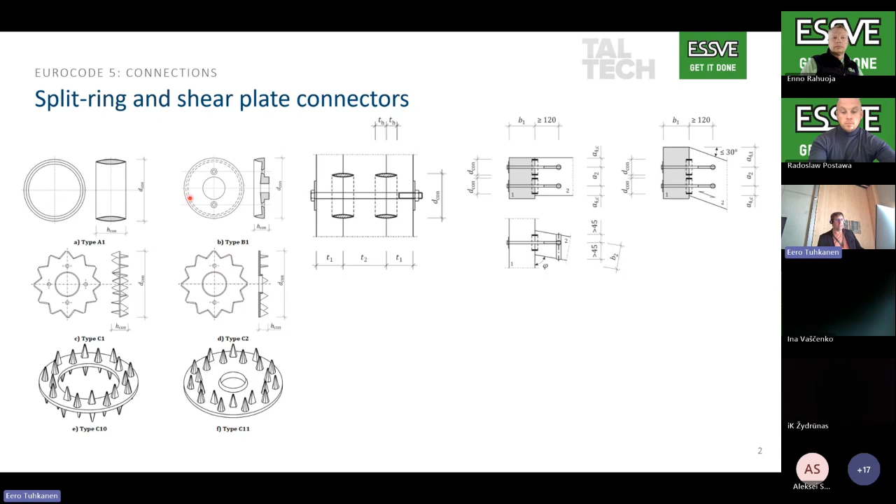in the connection. Also, the good thing about this bulldog type dübel is that it will minimize the slip we have in bolt connections. If the bolt connection is ready and we load it, first we get a small slip before the bolt connection starts taking the load. But if we use the bulldog dübel between the timber elements, we can avoid the first slip and get a stiffer connection.

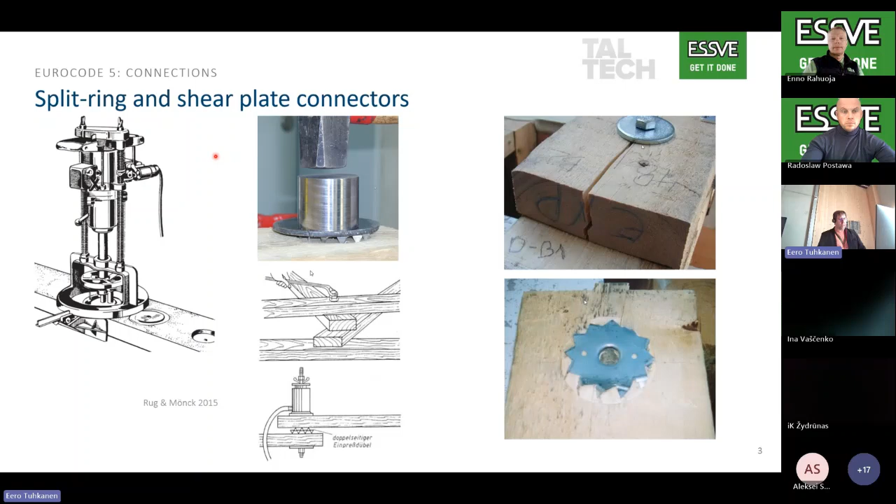Maybe the only problem is the implementation, or how we build the structure. This bulldog dübel needs a certain force to press it into the timber. I did some tests myself many years ago, and actually it's possible to hammer it into the timber, but it's not the highest quality. But there is some hydraulic equipment available that we can also use on site to press this type of dübel into the timber. So you can use it as it is, and this chapter is not changed much compared to the current Eurocode.

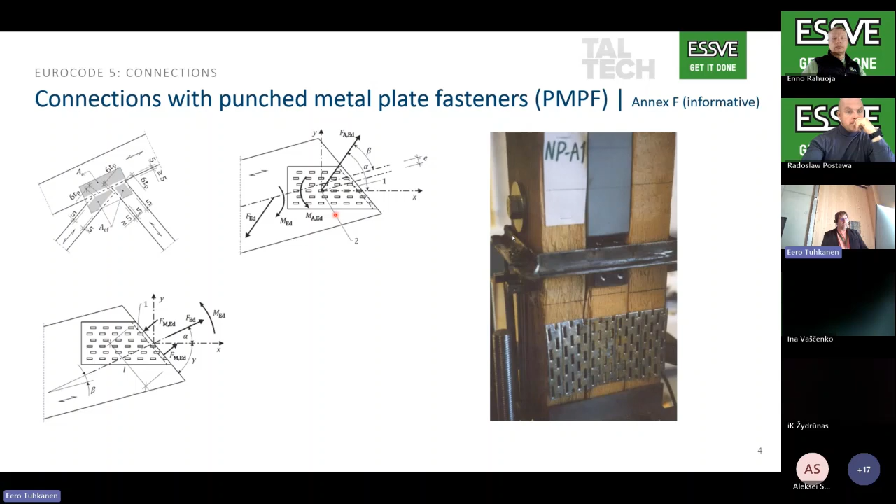The second type of connection is punched metal plate fasteners. Metal plate fasteners are moved to Annex F because these are mostly related to the producer, and the producer gives the required parameters for design. The design rules are the same, but in the new Eurocode there are more examples or situations shown of what to consider when we design punched metal plate fasteners. Last time I spoke about these reminders in the new Eurocode, that if you create a connection like this, you are reminded that you also have to check the tension perpendicular to the grain in the connection, and many different situations.

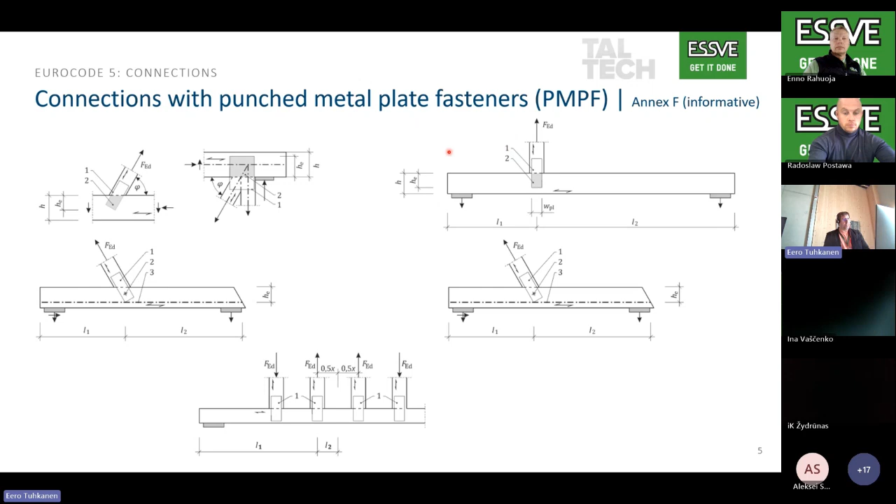The new connection type is a connection with expanded tube fasteners. It's a special type of connector, but the steel tube itself is not special. There is a strength class given. It can be normal steel tube, but the implementation, or how to press that into the wood, is special or needs special equipment. And the idea of this steel tube fastener is to increase the load carrying capacity of the connection, reduce splitting,

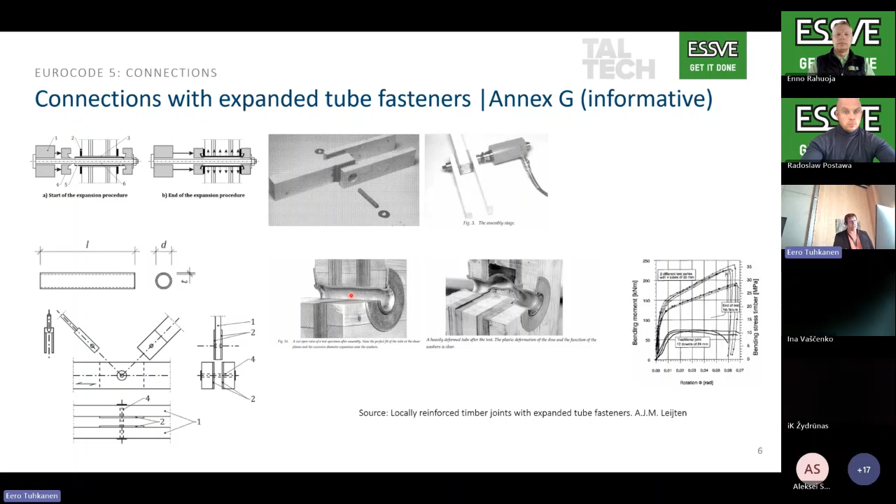because this type of connection uses densified wood in the connection, and also the stiffness is higher because there is no play in this type of connection as we have in the bolt connection. It's developed together with the seismic standard, so this type of connection is mostly related to the seismic region.

Question from the last session. Actually, this was the question not from the Baltic webinar, but from the Sweden webinar. But as I have this information here, someone asked last time: do we have in the new Eurocode design rules for bolted connections which are placed in circles? The answer is yes and no.

For so-called moment-resisting connections in the new Eurocode, there are only given the spacings and end distance rules for such type of connection, but not the design model, because design models can be different, and this type of connection is calculated according to the normal Johansen connection. The only rule which the Eurocode gives for this type of connection is the spacings and edge distances.

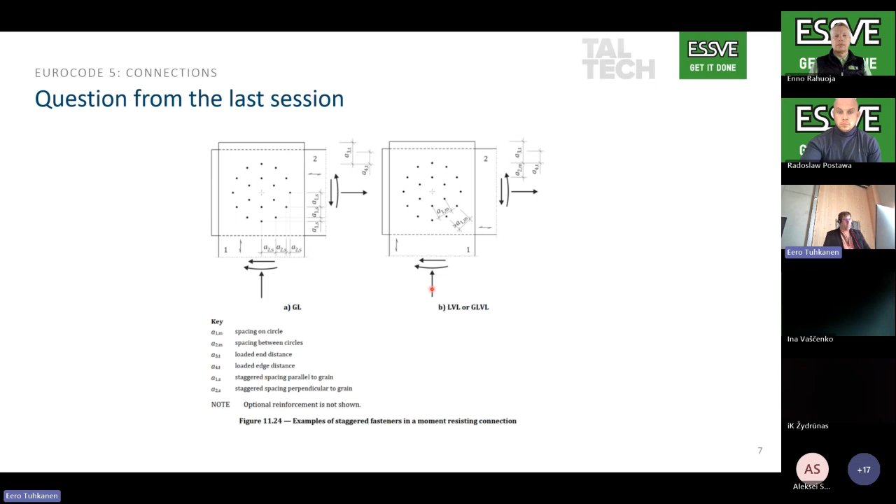And the next topic, which is our last presentation in this half year, is additional provisions to connections. In this lesson, I will talk a little bit about additional provisions and the other annexes in the new Eurocode. So this is all from my side.

From my side, I will take a little bit of an overview myself, as I saw that 50% of the users of ESSWOOD haven't done the registration yet or haven't used it yet. So maybe I will take the lead of the screen from Radek, and from a screen sharing point of view, we will guide you a little bit to where to find the ESSWOOD calculation program or other support tools from our website very quickly, and then we go for inclined connection.

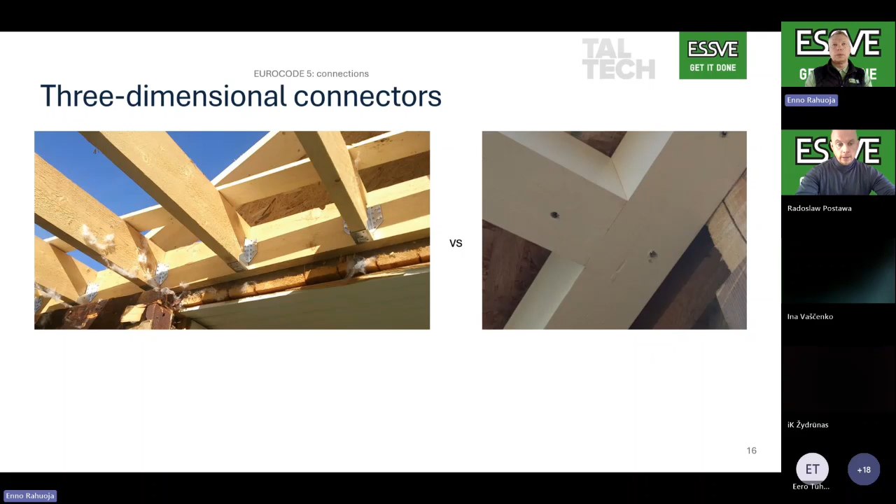Today's focus is different from previous time. Previous time we were looking at metal connectors, but we are not able to cover all applications with metal connectors which are out of the 90 degrees. So we will look into some inclined connections which are on an angle, either downwards or sidewards.

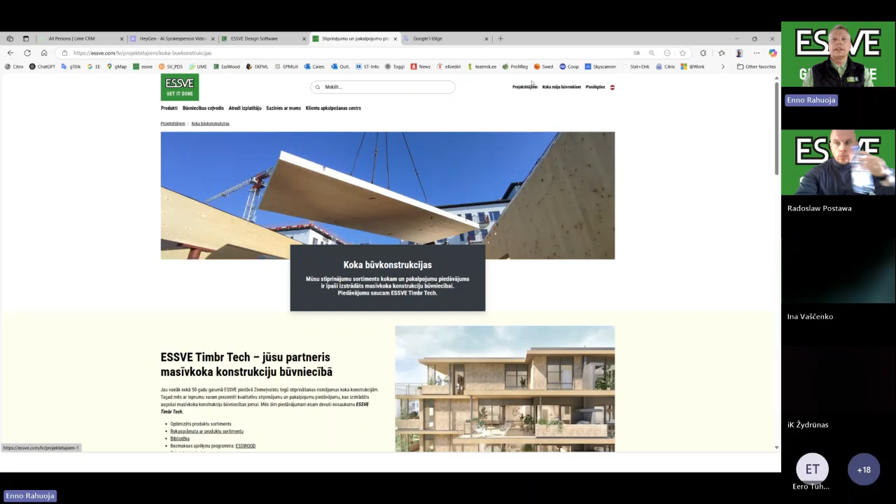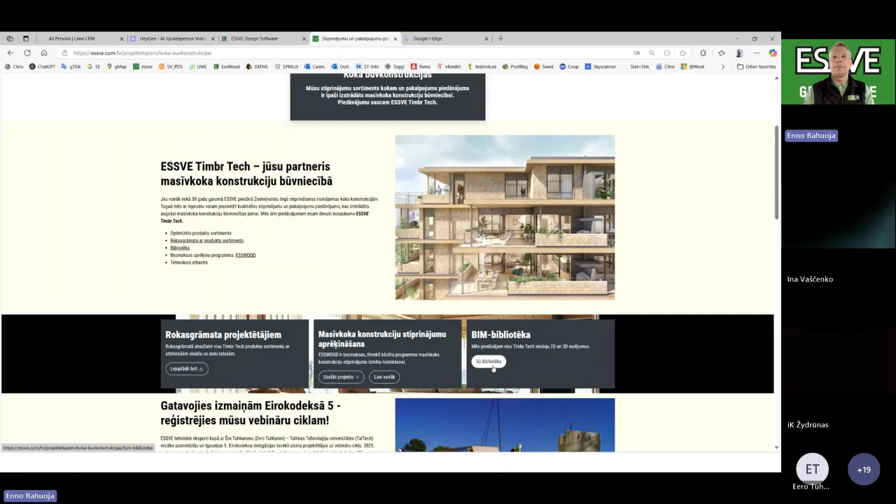To look now from the website, I have in front of me the Latvian website. Those who speak Estonian or Lithuanian can easily switch the website, but for engineers, here you will find the site where you can choose concrete, for example, or timber. We have also a calculation program for concrete. When you go to the timber side, you will find the ESSWOOD calculation program a little bit lower. For timber, you will also find the BIM library, with 2D and 3D drawings. So feel free to find all those locations.

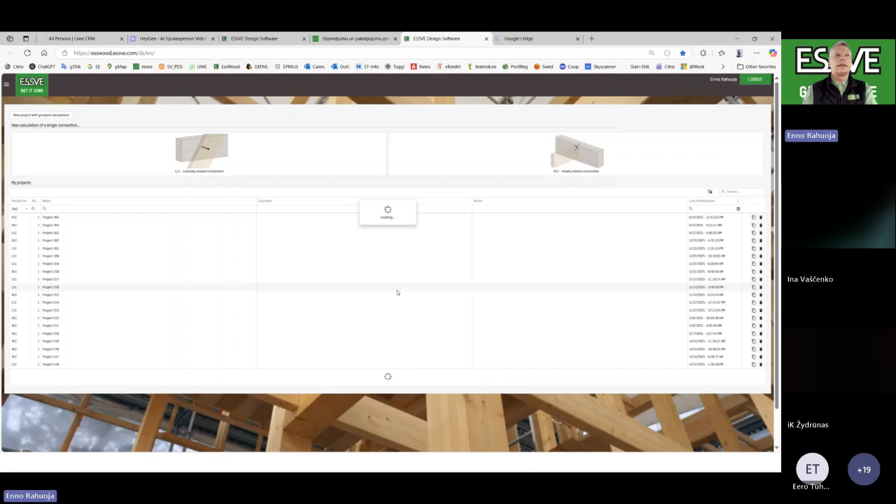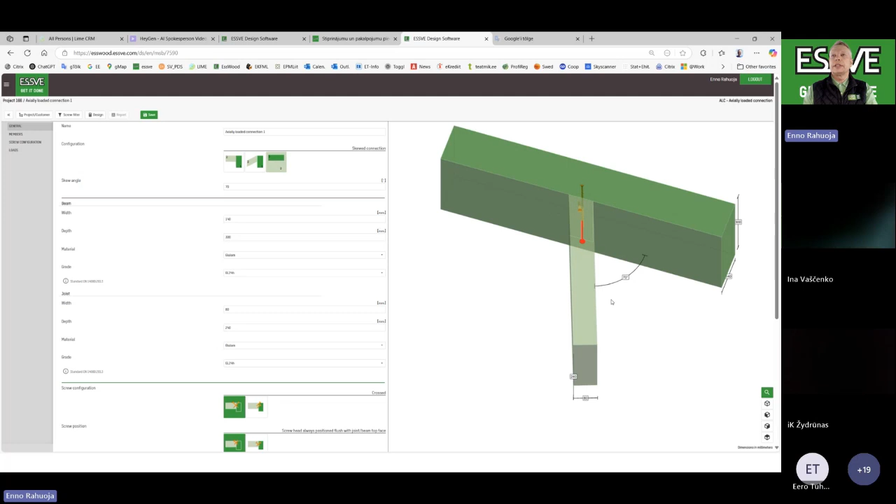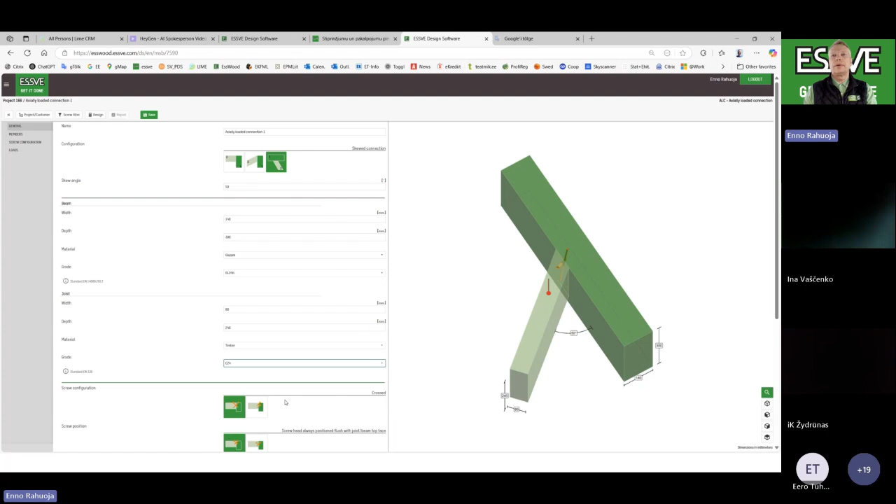As promised, we will not look at the 90 degrees connection, but at the angle connection. From the practical point of view, we can change the angle here. Let's make it even sharper, 50 degrees, for example. For parameters of the timber, you can select them here. Instead of glulam, you can have ordinary timber, for example, and a little bit higher grade, C24, for example. You can also change parameters here.

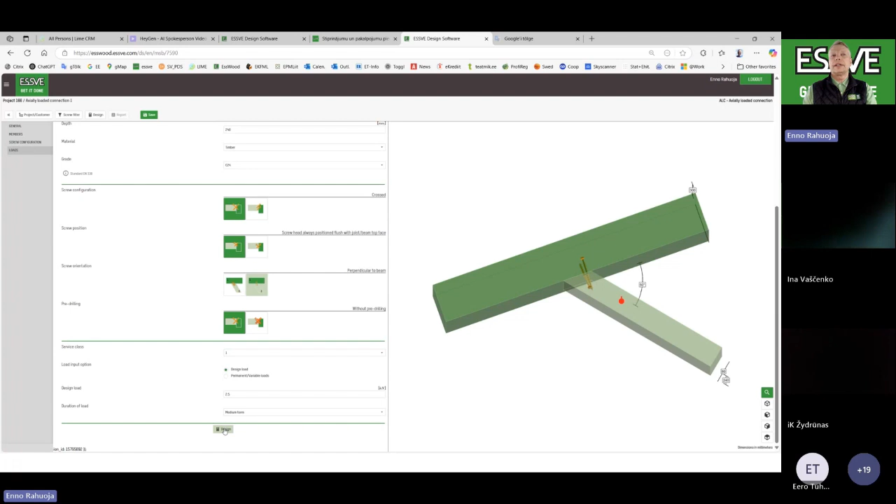But from a quick point of view, if we look at such an application and how installers like to install it quickly, installers often like to install it faster this way, because it's cross on that main beam or main rafter. And if I go to a very quick calculation service here, then there are not so many choices at the moment. It gives only one choice.

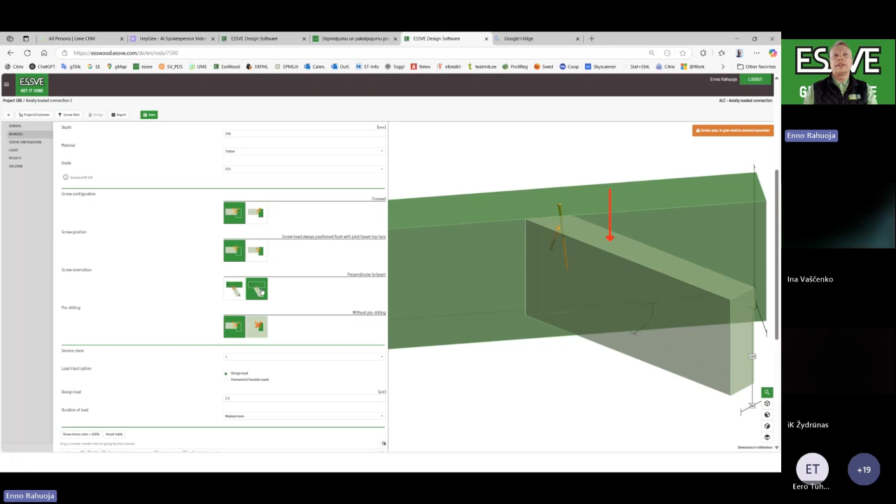And even here we need to look also at the red-marked perpendicular load. So there is an option also to move this cross-fixing a little bit to a lower area. Then we go back, and if we move it to a lower area, then we have a risk factor that moving from up to lower, we might not find any application at all. So the best choice in this part is to keep the connection along the side beam direction.

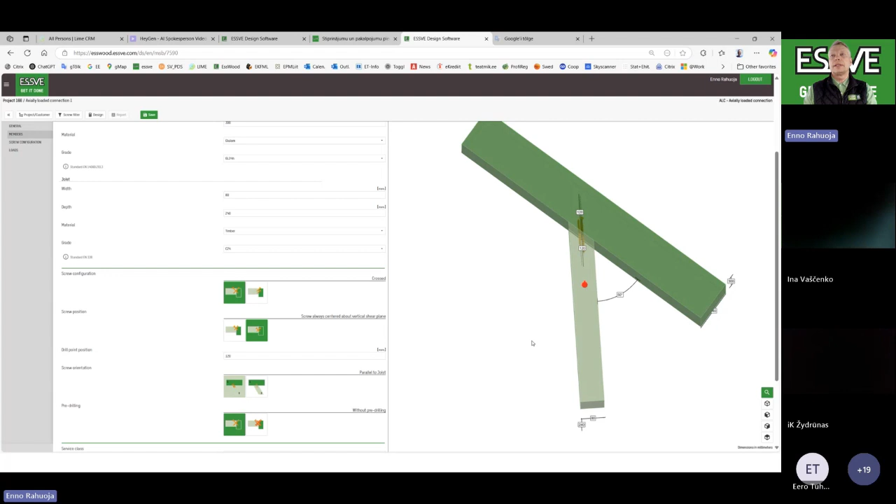So we have it from here, so that the fasteners go along the side beam to the rafter. And let's say in the first calculation, the connection is up here in draft mode on this calculation tool. You can also select here the service class. For example, for roofing, often service class 2.

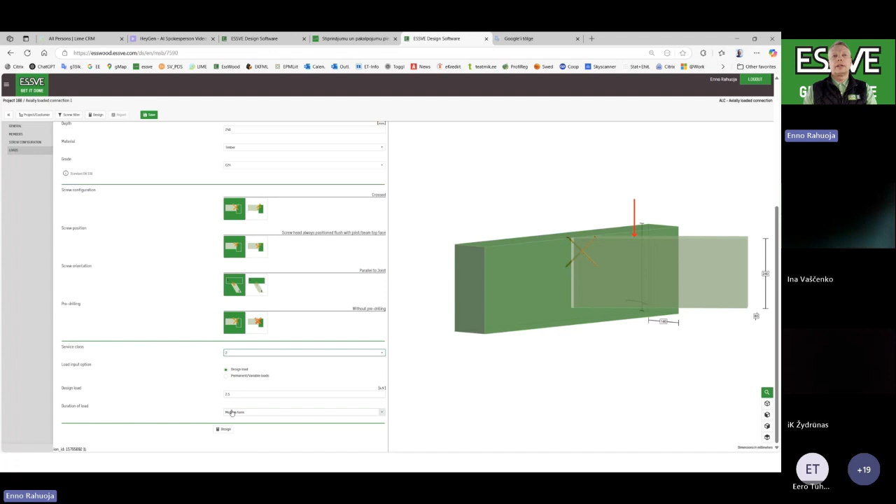Here you can put some design loads or permanent loads on it, change the figures, and when you go for the design calculation, then you will find out that we are a little bit limited on this type of connection, with the length of 245. For the others, we should do some additional calculation to see whether it fits or not, or secures all the loaded area. But here is a small trick which you could play.

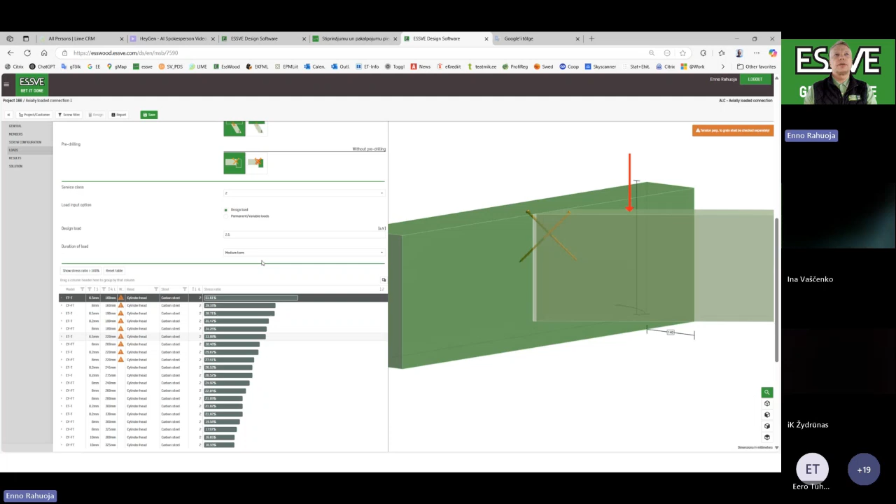So when you go back and move this cross-fixing a little bit lower, you choose here, let's say, middle fixing. So I put it here. Before it was up here, now we go for lower fixing. And we still keep the direction along the side beam. There is also an option for pre-drilling here on the bottom, but at the moment we don't need that due to the wood parameters. And we go for design.

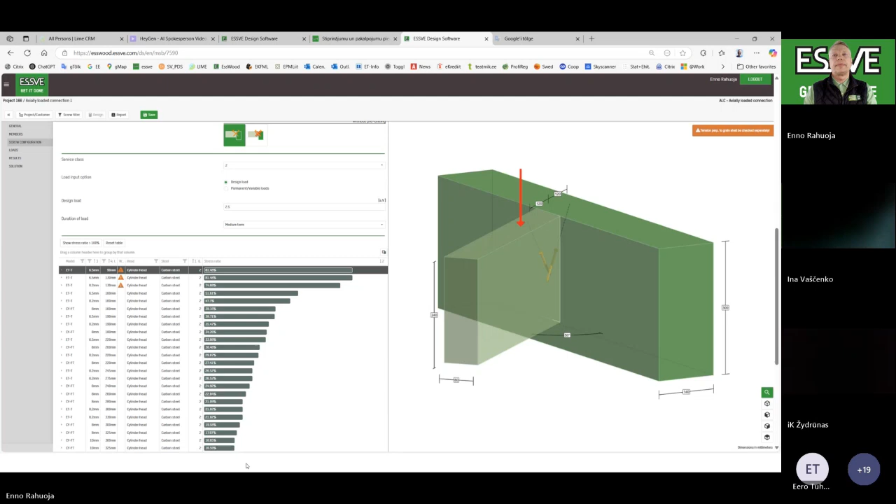Then in this case, we see that we have a good choice starting with fastener length from 160 millimeters, which is a lot more competitive compared to the 245 we had before. And now if that safety factor of 51.61 is not satisfying you, then you are able to look here at a small arrow in the front. When you click that arrow, we have other choices. So we can even have 2 cross fixings here, which brings us 4 fasteners overall in this connection. So let's say our choice is to go with this one.

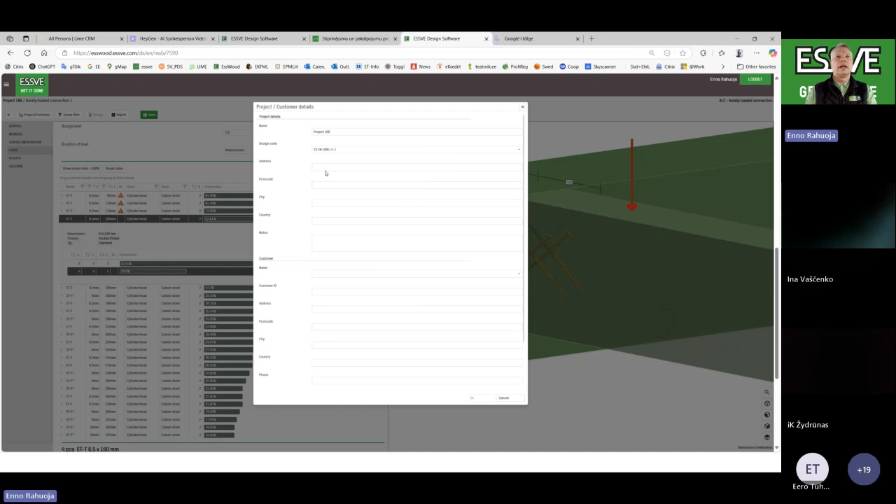You also have here on the upper level a fastener filter. If you want to reduce the selection of fasteners, let's say you want to leave out countersunk head and flat head or hex head, then you click them and it will sort them out. But if you also want to add your project addresses, you can do that as well. So all those opportunities are there. I will put it here just as the Academy, for example, as a project sample, then you see how it could come up.

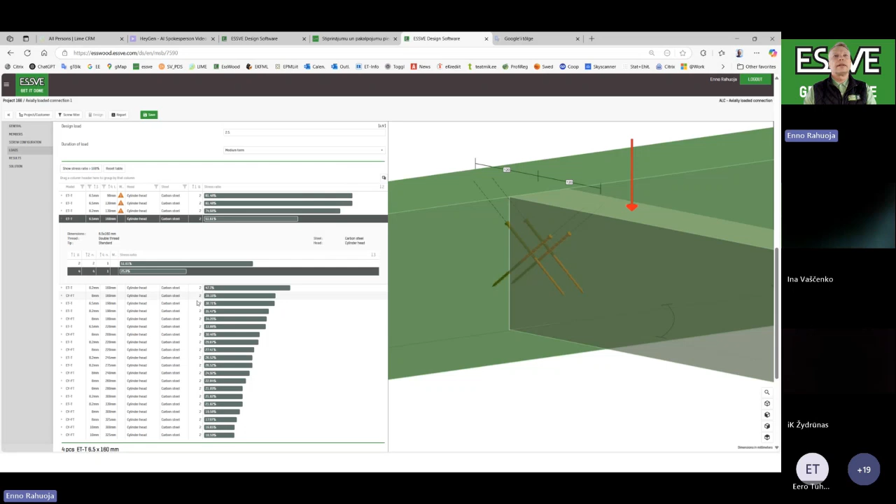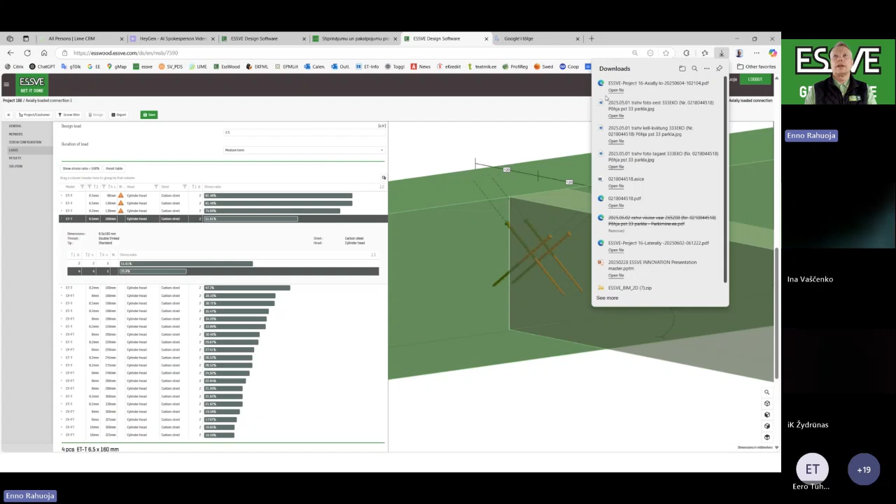And to get your report of this application, we get it here. When you click on report, it comes to you and you are able to download it. Here it comes. And the Academy was filled in here. You will get all the wood parameters. You will get the fastener properties with technical values. You will find here your data, with your name, company name, email address, and phone number, so everyone can be contacted.

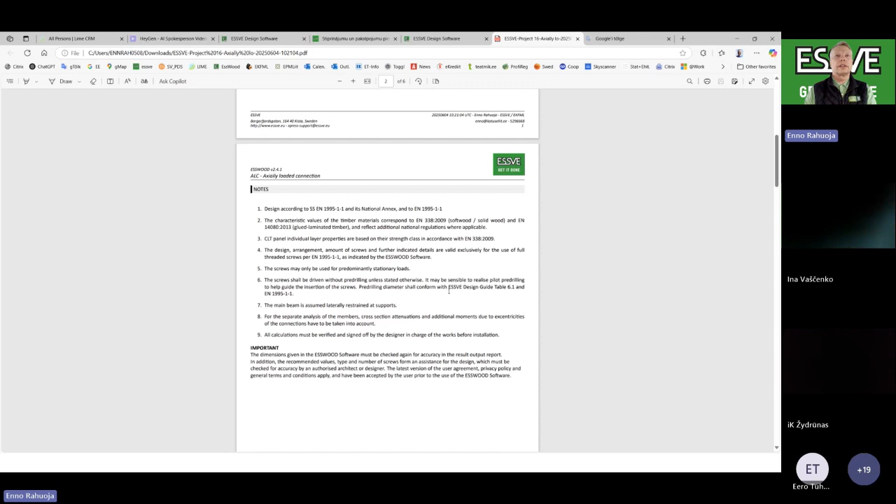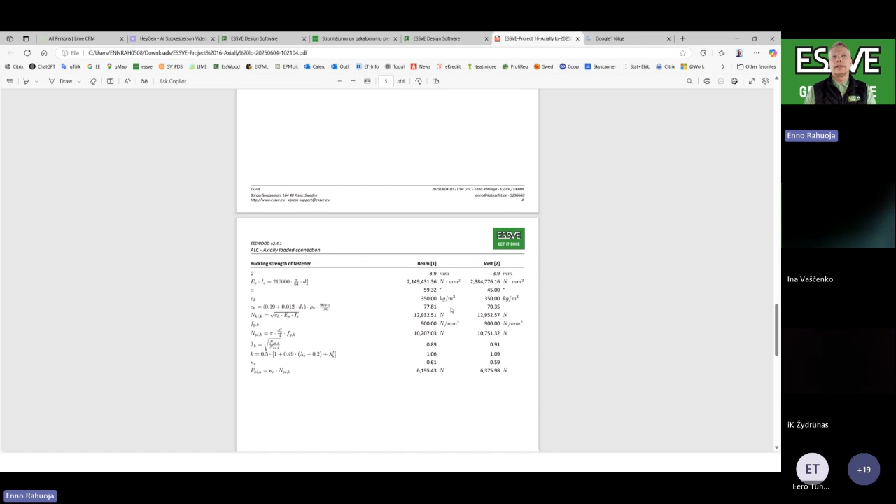And here you will find the standards which are followed. And this is the page you can print out for installers. And if you want to double check manually how the calculation is made, then it's on the back side, on the other pages. So you're able to go step by step through and see whether it's really according to what I was planning.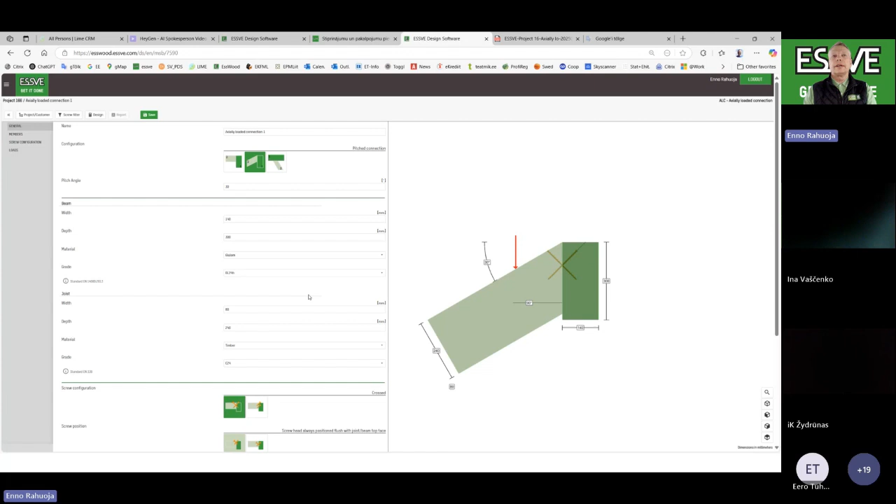I will also maybe use the opportunity to show another sample as well, a pitched connection, for example roofing here, where we like to make the roofing connection on a first draft or default application. The connection is a little bit upper. And when we go here for application, maybe I will make a trick that the common rafter width is 45 millimeters. If I change that to 45 here, and the common is 250 maybe, and we have ordinary timber, and we leave the rest as it is, then we go for design, and it could be a situation that we don't find any fastener.

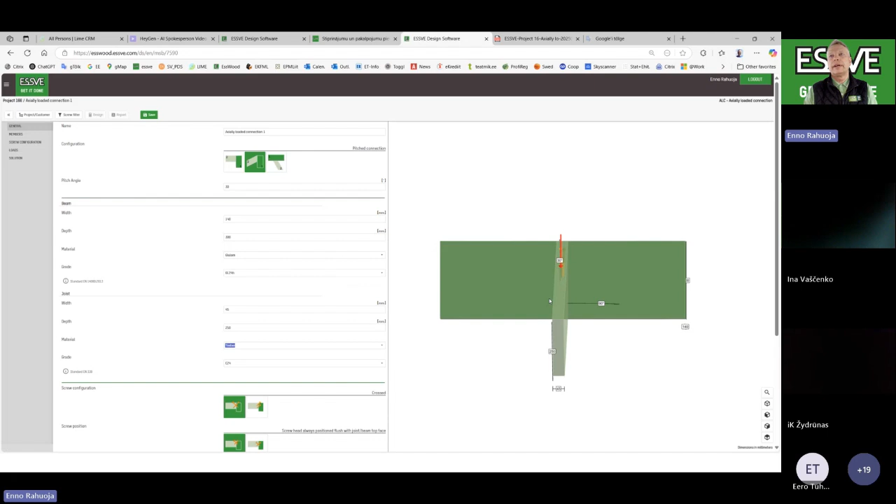Many of you maybe know what the reason is, but the reason is the width of 45 and the cross fixing here. There is not enough room for edge distance to fulfill this application. If it were a wider wood, then we could easily handle it. But with narrow wood, I would say that it doesn't help even if we move this connection lower. So the only thing we can do here is a parallel fixing. And in that parallel fixing, we will find a solution for this.

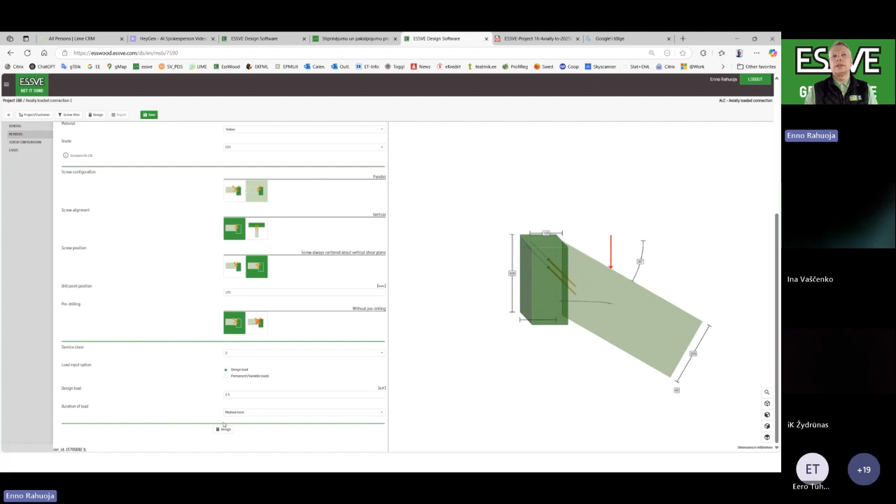And now we see that we have a whole bunch of fasteners. We don't have any red mark to pay attention to or recalculate. And if we are not feeling safe on this connection, for example, we have it in assortment everywhere 160, and we wanted to use the cylindric fastener with 160, then we can also select more fasteners here. And then the safety factor goes to the 35% level.

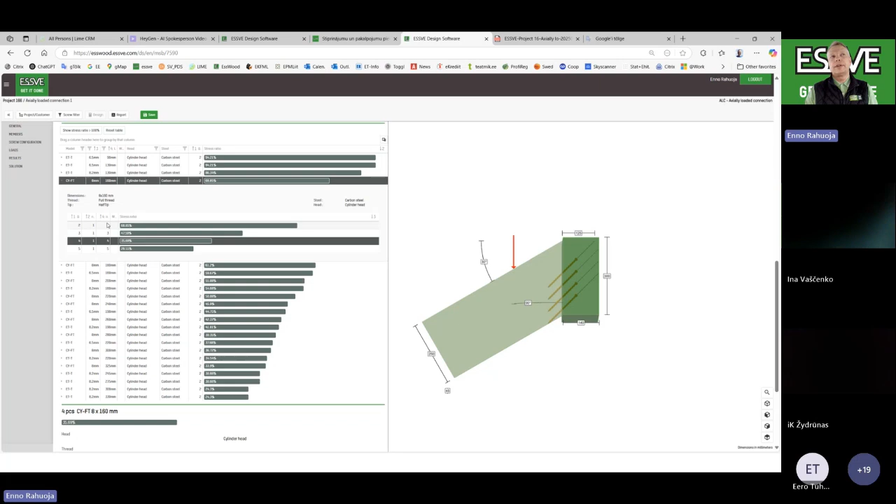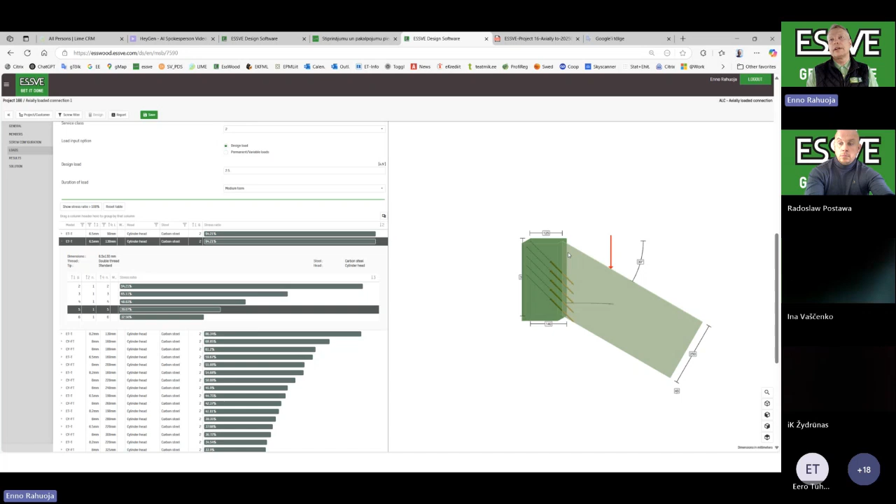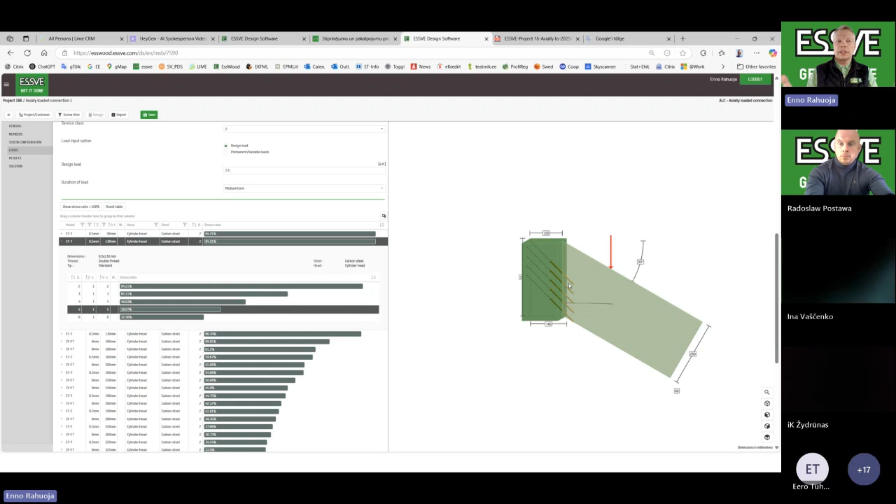In some cases, in such an application, I recommend using a full threaded fastener. If we use, for example, a double threaded fastener here on ETT, then in the ETT case we have a situation, for example, similar 5 fasteners, where we need to have one additional fastener to make this wood stiff on the connection, because the double threaded fastener also has a traction force which pulls the connections together. And it's a risk factor on angle fixing when there's no cross fixing, that it will pull that rafter up.

Let's make it bigger for you. And when we don't have another cross fastener here which helps to hold, then the double-threaded fastener will move it a little bit higher and will take the leveling out of the rafter position. But experienced installers know that they leave it 8, 9 or 10 millimeters lower. That rafter starts installing at 45 degrees, and it will pull that rafter into the correct position. So it very much depends on how skilled the installer is with this application.

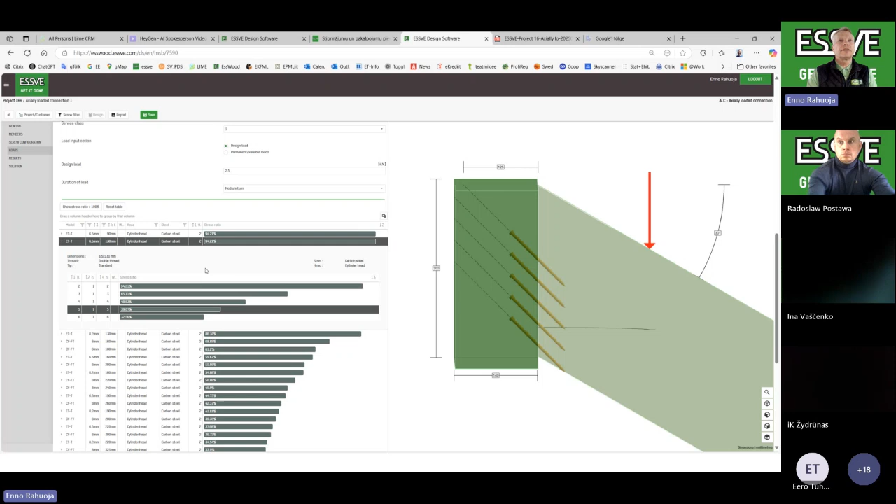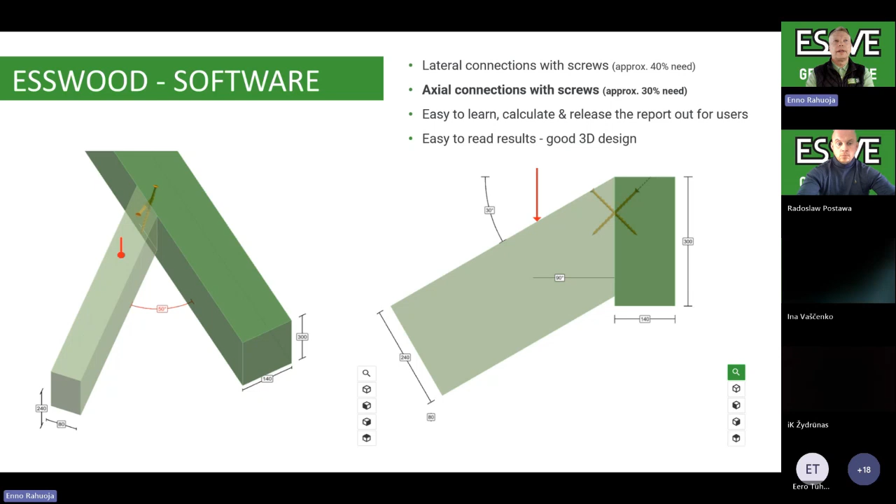But this is all from my side. We have just 5 minutes to go. Overall, thank you very much for watching us. Coming back to the presentation part, I would say ask for pull-out test services, and look into the concrete calculation program.